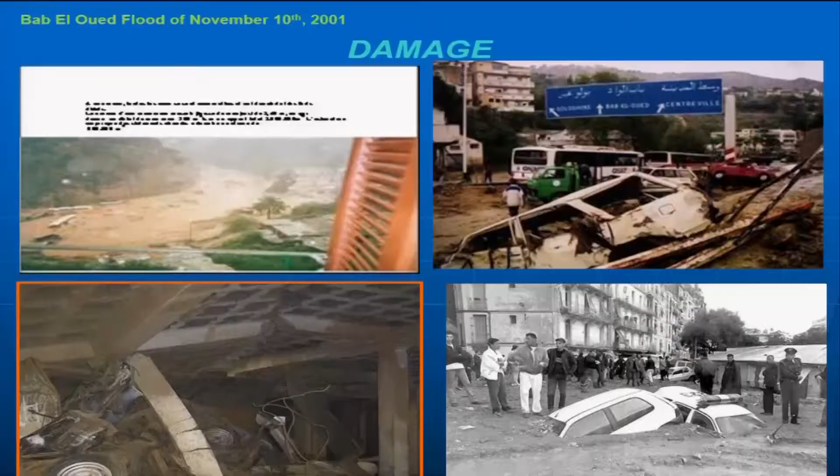Main sewers and drainage systems were completely clogged, with significant damage to water, electricity, gas, and telecommunications. The preliminary cost of this disaster was $250 million US. These are some photos of the damage in the city center. That is the urban risk in floods.

And you can see here, this is an expressway just in the bed of the river. You can see the expressway and the cars, what happened that night. Here, the damage to the public infrastructure, and the mud in the city of Bab El Oued. Here you can see the floating cars and trucks on the expressway of Frais Vallon in Bab El Oued. These are some pictures of the disaster.

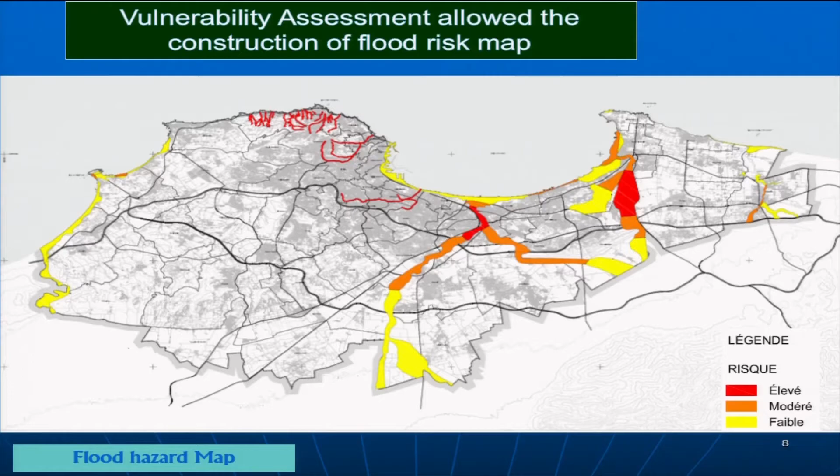Here is the study of vulnerability. After the disaster, we made vulnerability studies to see which zones are vulnerable. And this is what we found. Bab El Oued is here. You can see the river. And this is where the risk is high, moderate, and light.

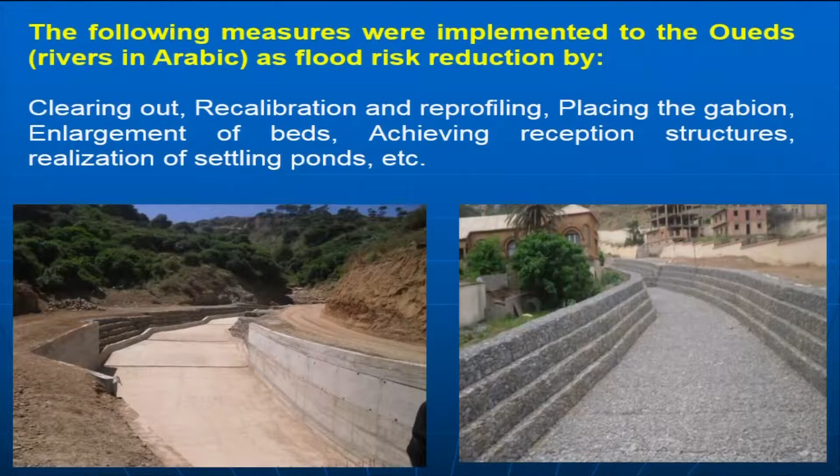Just following the disaster, the government implemented the following measures on the Oueds. Oued is like a river in Arabic. For flood risk reduction: clearing out, recalibration and reprofiling, placing gabions, enlargement of beds, reception structures, retaining structures, and realization of settling ponds.

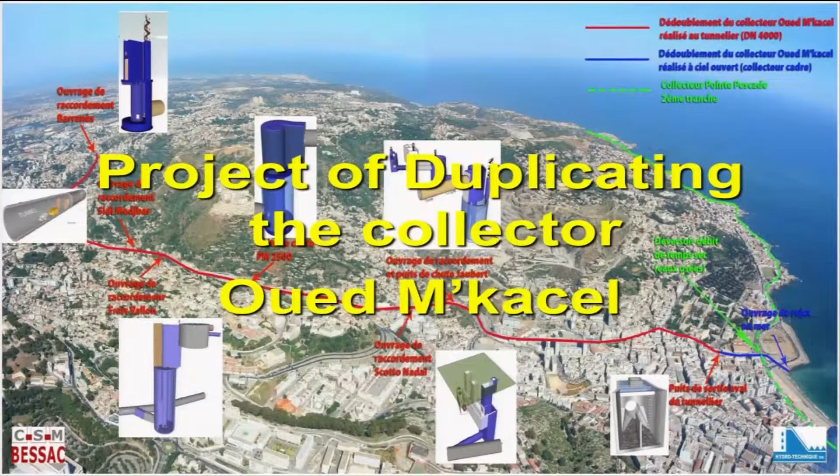Then the government decided to invest public money in this region of Algiers to reduce the risks. This is the project of duplicating the collector of Oued M'kacel, which you can see here, about 5 kilometers, in order to absorb the river in future disasters.

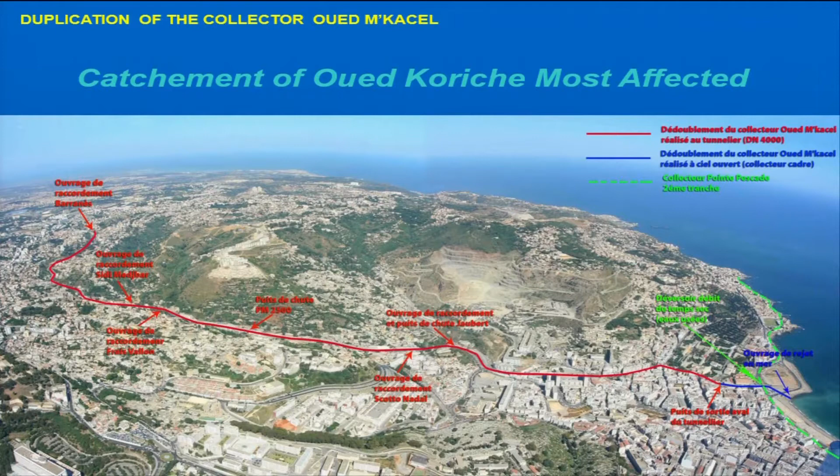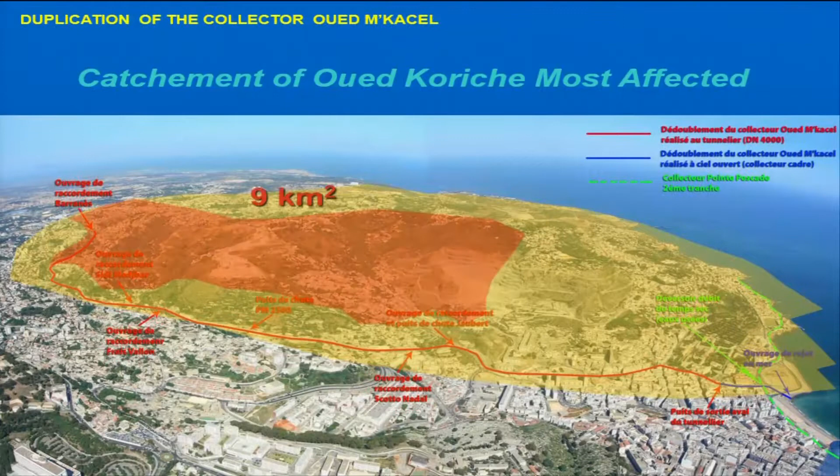And this is the catchment of Oued Koriche, which was most affected. Here you can see civil engineering structures, which I'm going to show. Here there will be a tunnel made under the city. And here in blue, we will have open-sky frames for the water. The catchment is 9 square kilometers. This is what we are trying to do: catch all the water and bring it to the sea.

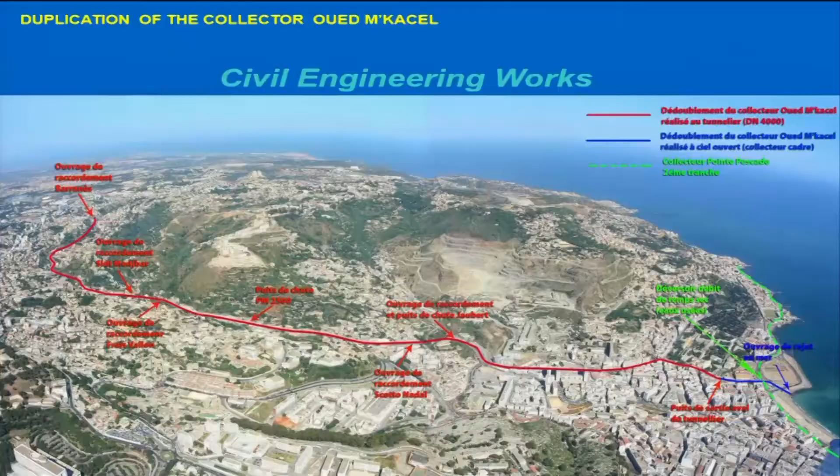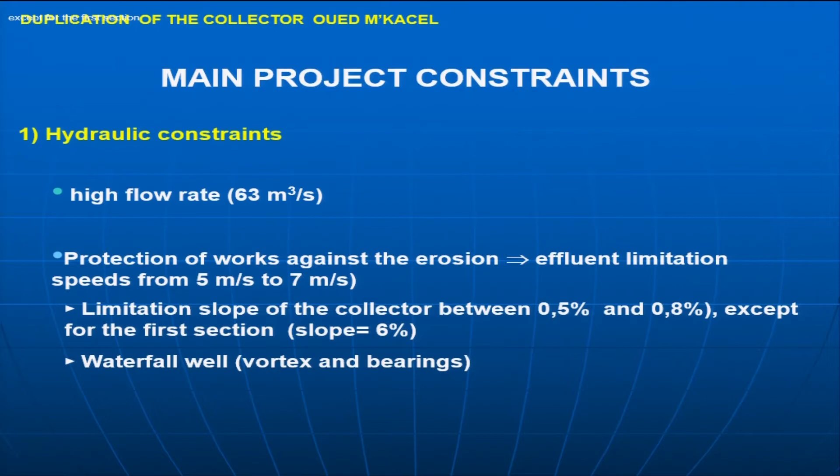Civil engineering works: the main constraints when you do this in an urban site are the hydraulic constraints due to high flow rate, like 63 cubic meters per second, protection of works against erosion, effluent speed limitation from 5 to 7 meters per second, and limitation of slope, because the slope is very high, of the collector between 0.5% and 0.8%, except for the first section where the slope is 6%. Water well vortex or bearing waterfalls. These constraints must be integrated in the hydraulic study of the region.

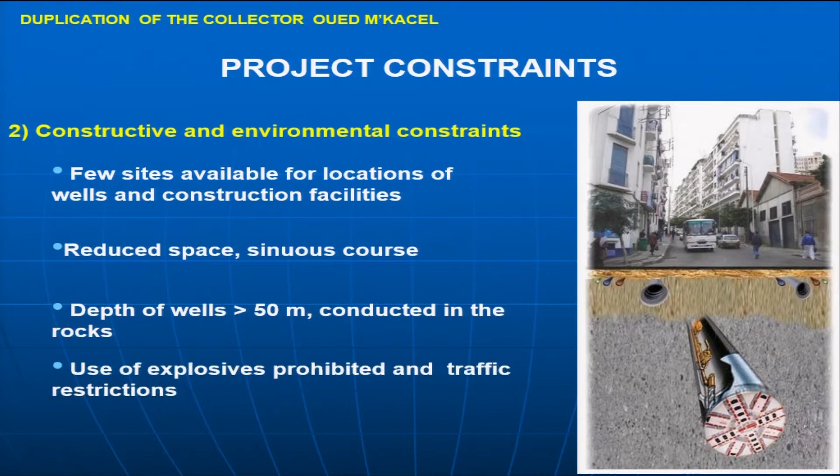Depth of wells more than 50 meters, conducted in the rocks within the city. Use of explosives is prohibited because we are in the city, and traffic restriction, of course. Protection against the swell of the sea, because the sea is coming in the mouth of the river.

And this is the project you can see here. You can see the wells here, the waterfall wells. This is the slope going from 220 meters above the seawater to 4 meters. This is the slope, it's very high. And these are the waterfall wells, 20 meters, about 5 kilometers up to here.

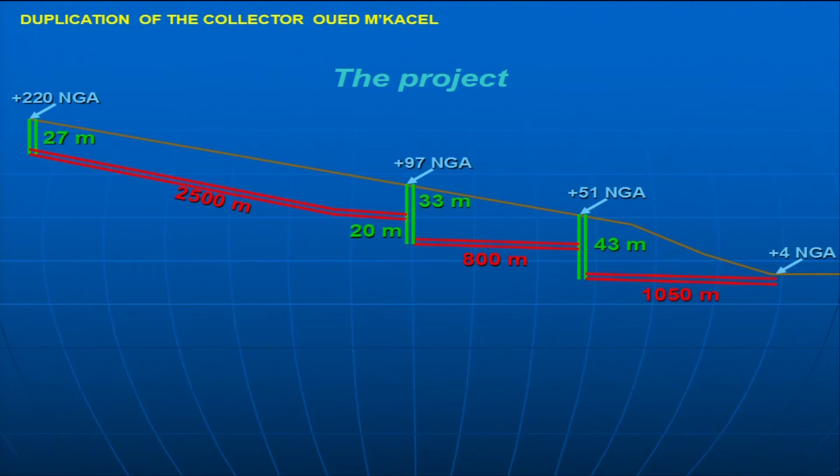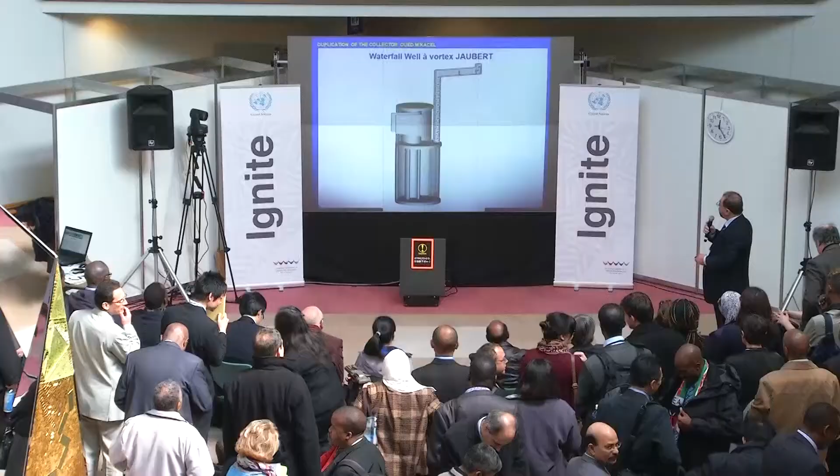This is the average depth of water line, 30 to 35 meters. That's very deep. Accumulated heights of all of wells, 50 meters. Accumulated height of the connection wells, 150 meters. And this is the type of waterfall well and vortex à Jaubert. This is what has been constructed in this city, because we have the slope, we need these waterfall wells.

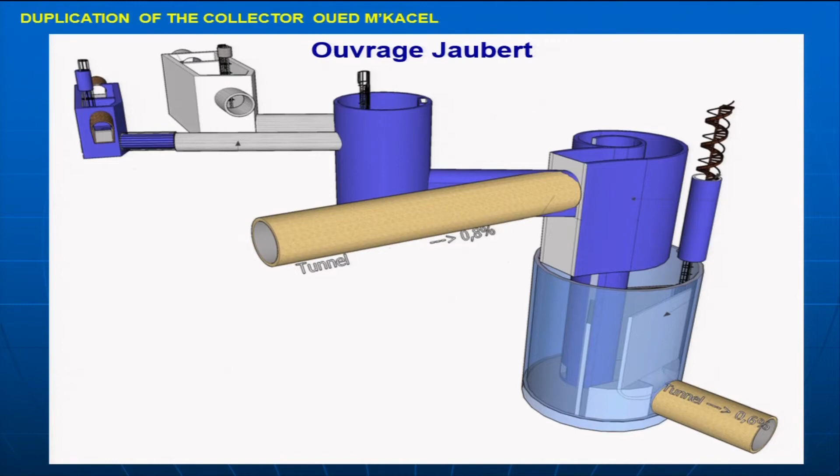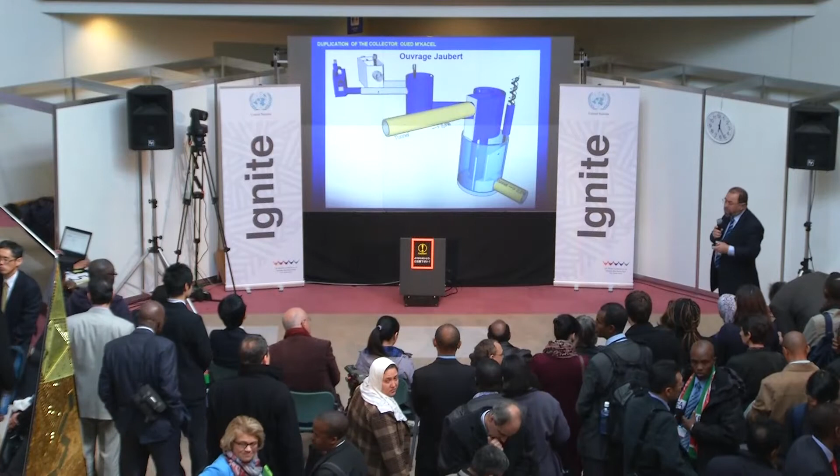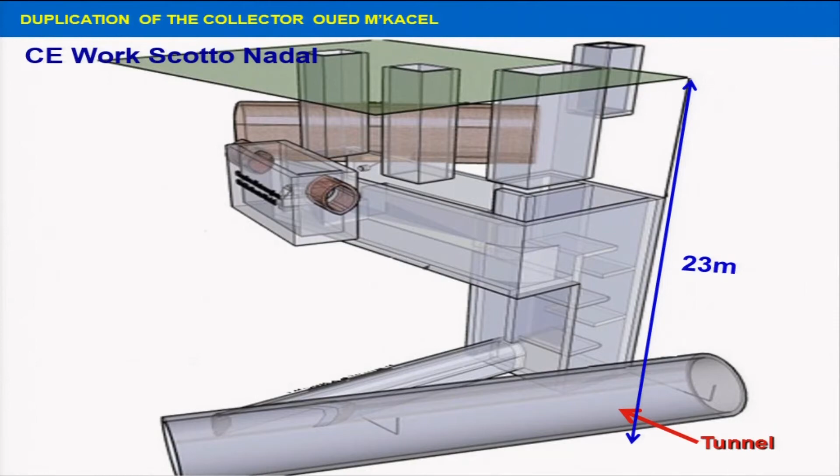See, 44 meters of the wells, and you see these connecting tunnels, interception rooms. These are all the techniques of the tunnel, the new tunnel here, and the waterfall. You have the bearings here, waterfall bearings. The gallery of junction, the drift removal, sand and gravel. And you have the access chimneys for the people there. See, the depth is 23 meters.

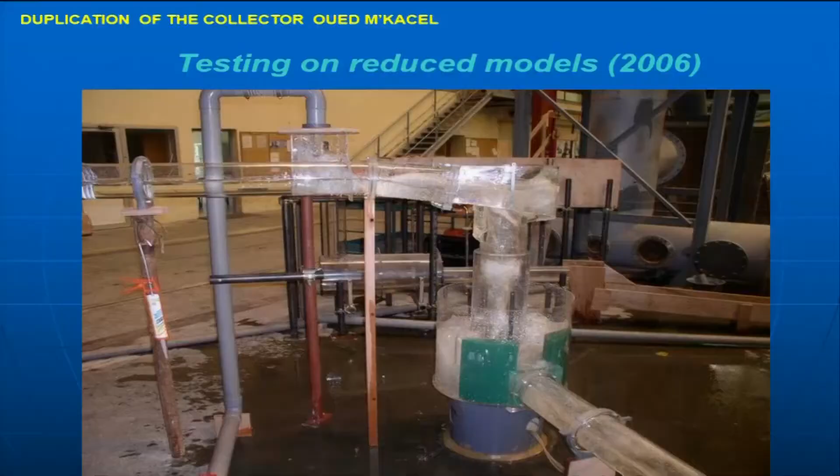Testing, of course: this has been tested in the laboratories before implementation because this project is very expensive. And this is the vortex, how the water will go to the tunnels. And you see all these testing models that have been tested in laboratories. This is the collector of open sky. We have the tunnel, we have the open sky. This is the tunnel, which is made in concrete, of course. You can see it here also. This is to reduce the future disaster risk of floods.

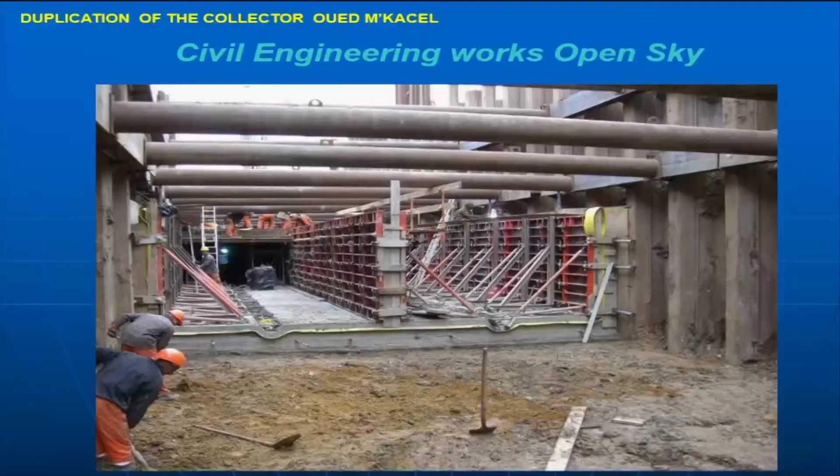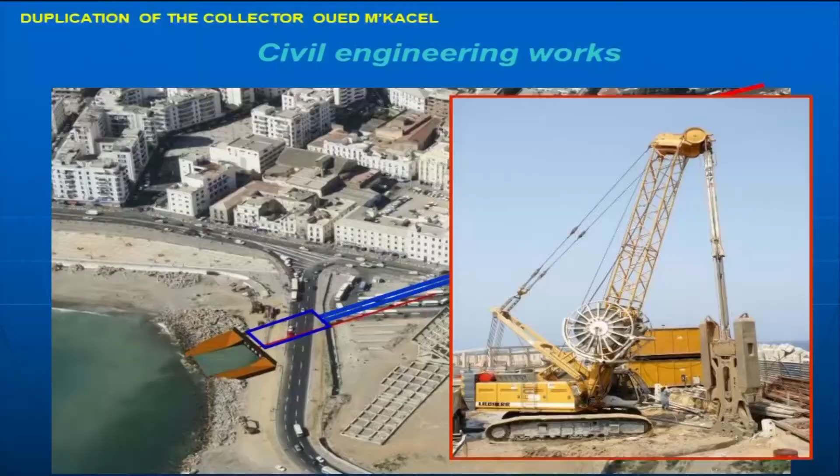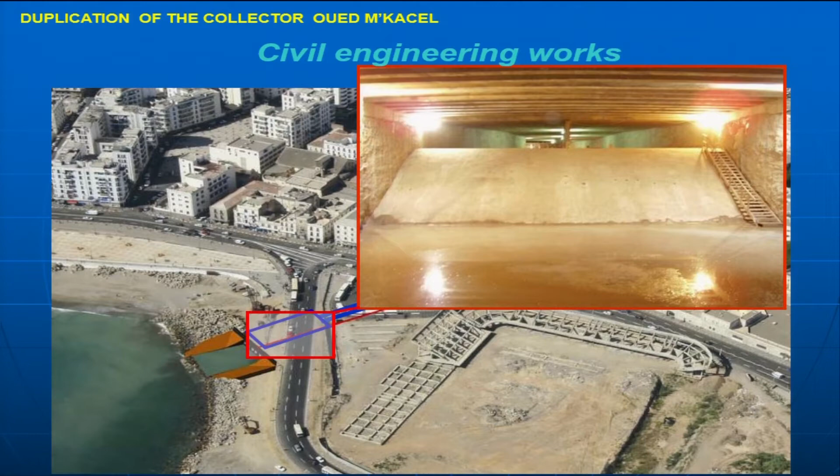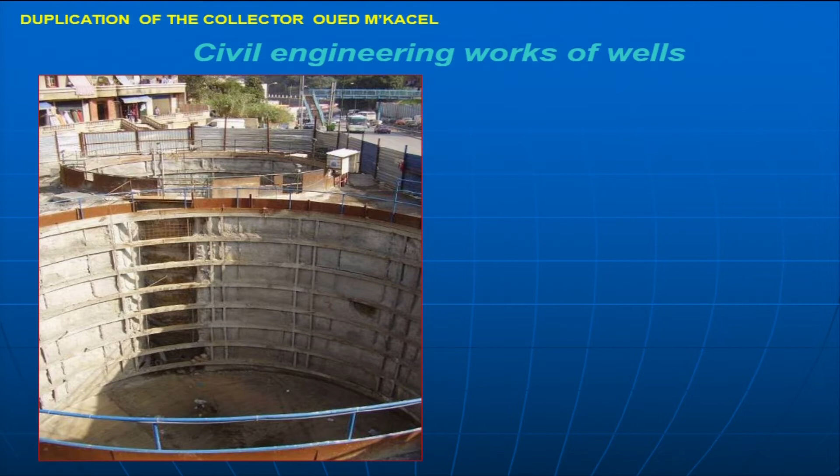In water, see, it goes from within the city with all difficulties to the sea here. And you see the complicated material that has been used. And this is very important so the swell of the water cannot come back like last time. Then we have the flow coming to the sea. These are the wells that have been excavated in the soil. See how strong these civil works are, and how deep also, 53 meters going into the city.

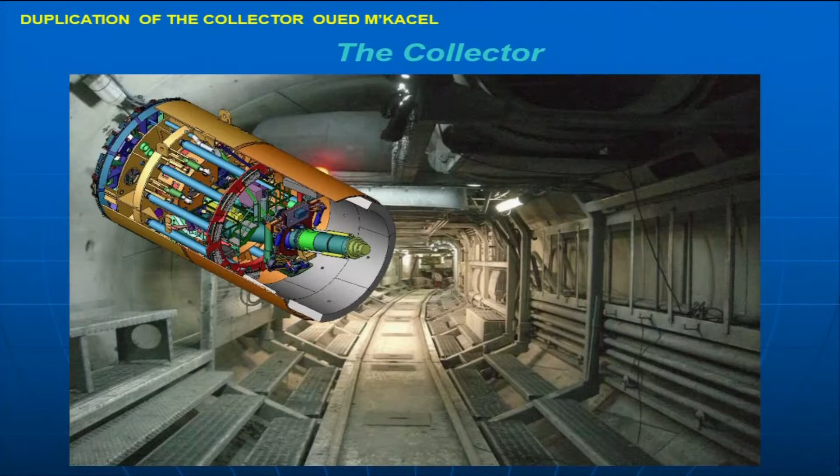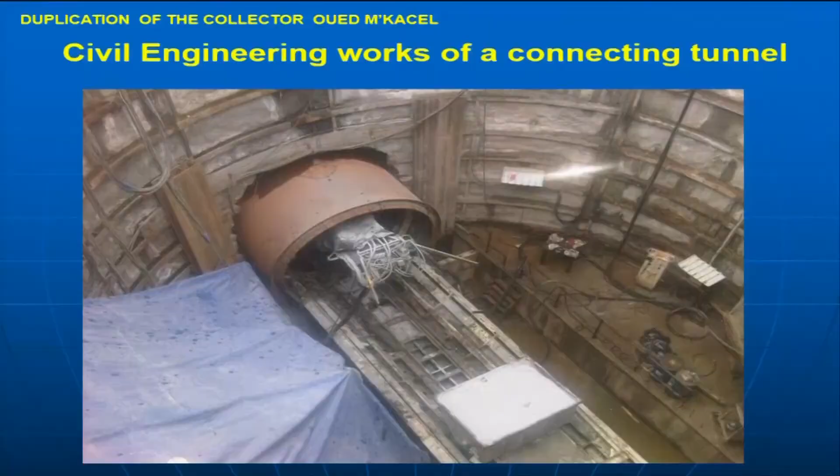And this is the machine. This is the tunnel, the new collector of the sewage system. And you see the tunnel with the well, the junctions. See the tunnel and all the junctions of the canals. And this is to the sea, to the junction chambers. This is the vortex which has been tested in the laboratory. Now it's here in reality.

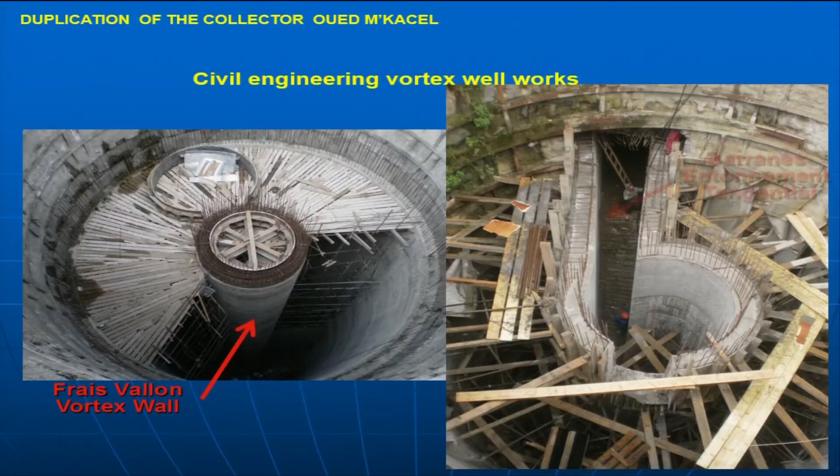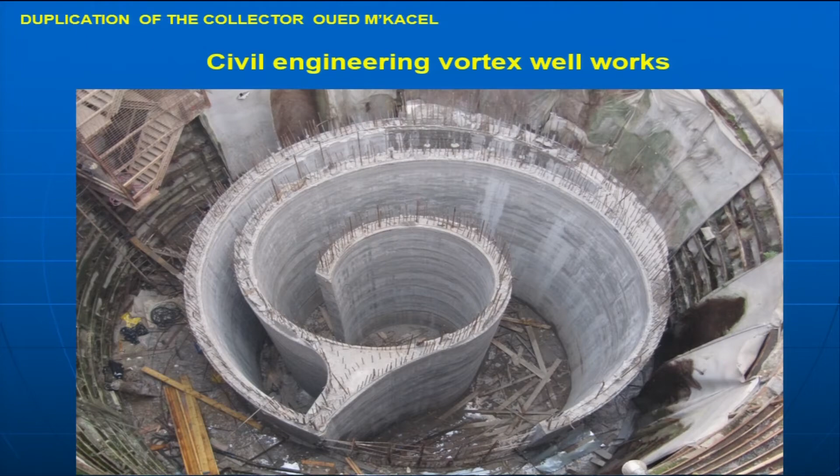Civil engineering is a complicated and sophisticated thing to be installed. This is the tunnel excavation, 83,000 cubic meters, concrete 28,000, steel 2,000 tons. I go quickly. Then in the wake of this disaster, the Algerian government allocated for a disaster flood reduction strategy across the whole country a total budget of 3.6 billion US dollars.